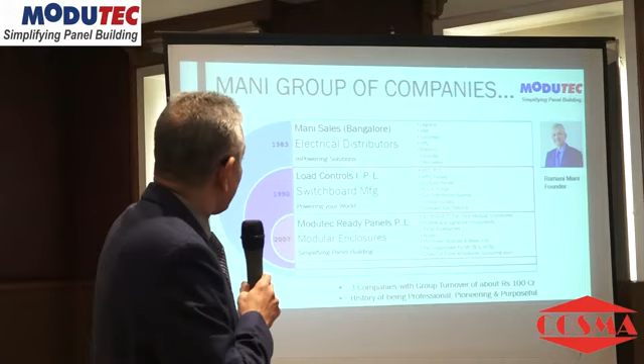Load Controls is a switchboard manufacturing company which started in the year 1990, and the entire range of products is there, what we manufacture. When I started in 1990, thoughts kept going in my mind. I also had a lot of problems in business. Sometimes you're flooded with orders, you have to refuse orders. Sometimes there's practically no orders.

You have to sit down with your, in those days we only had a telephone index, and then calling up each one saying that, yaar main hoon aapke liye, kya halchal? And this was the kind of situation. So the thought process was, what is it that I need to be doing differently in order to have a more steady growth? So in '96, I went to Singapore. In a week's time, I visited about 18 panel building units.

And that's when I came to know that even in Singapore, they have the conventional welded panels, but they also have a very beautiful semi-modular, semi-bolted design of panels. And what really took my breath away was a completely modular, world-class enclosure system. This was manufactured by a company called L Steel, who are also there in Goa. I pursued, went over, had a look at their factory. A lot of efforts were put into understanding how we can bring this modular technology to India.

So I got onto the drawing board because importing and selling in those days were very difficult because of the import duties which were there. And in the year 2000, I introduced the modular technology in a very simple fashion. But the moment I introduced the modular technology, I dropped the welded technology like a hot brick. Now, what happened was the ease of manufacturing enclosures was so very inviting. Customers were very happy with the look and feel of the panel.

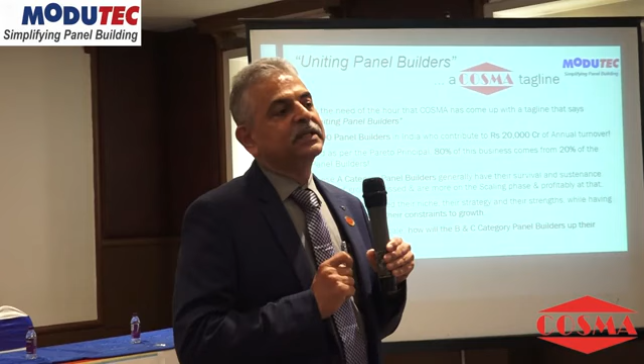So all the 3 companies together do a turnover of around 100 crores, and we have a history of being professional, pioneering, and purposeful in whatever we do. I must thank COSMA not only for this opportunity of presenting Modutec to each and every one of you, but also for this beautiful tagline called Uniting Panel Builders. And in one sense, I would say that this is a kind of a mission for Modutec as well. And we need to be seeing how we can do this.

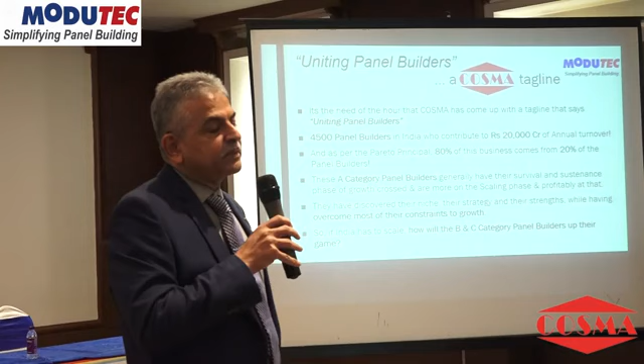In India, there are approximately 4,500 panel builders across the country. And about 20,000 crores of annual turnover gets added by the control panel industry. But then if you look at the Pareto principle, it applies beautifully here also. 80% of the business comes from just 20% of the panel builders. And this is something for us to really think about.

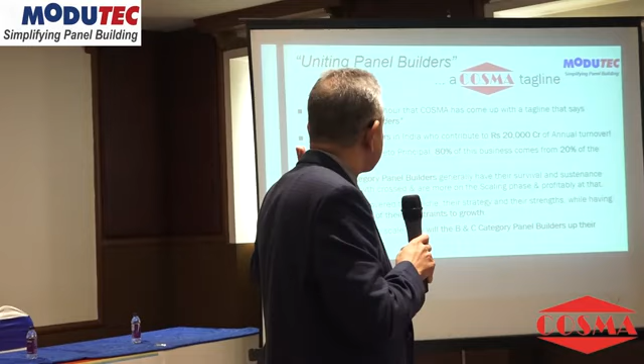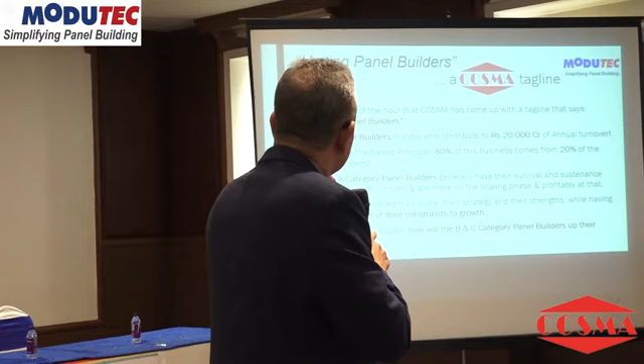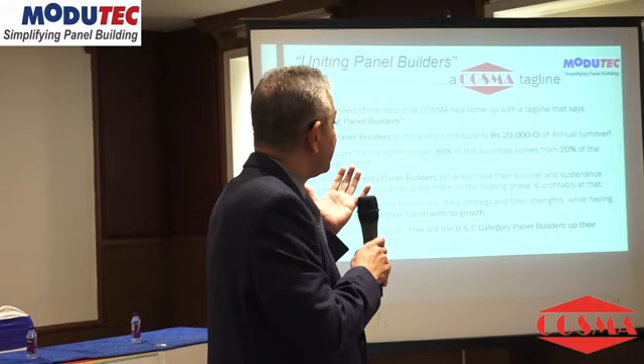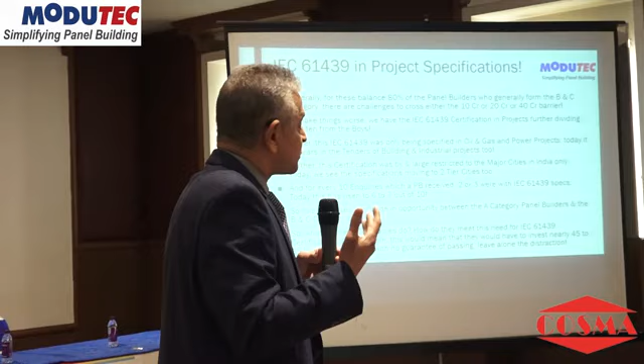Why is it so? The A category panel builders generally have their survival and sustenance phase crossed, and they are more on the scaling phase, and profitability also automatically happens with that. And how? Because they've discovered their niche, their strategy, and their strengths, while they've overcome most of their constraints to growth. So if India has to scale, how will this happen without the B and C category panel builders moving up in their game? This is an important question which each one of us should be asking ourselves. IEC 61439 in project specifications has become something for us to reckon with.

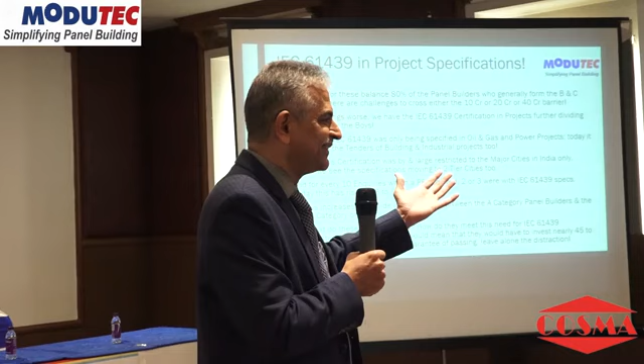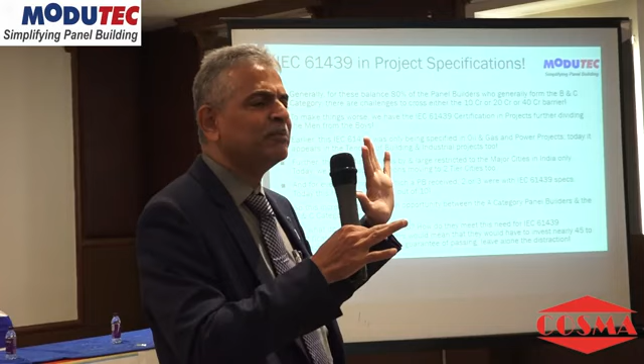Generally, for the 80% of panel builders who come under the B and C category, I've been talking to a lot of panel builders recently, and over my 38 years in business, I find that there are panel builders who get stuck at 10 crores and year on year stay in that range. There are panel builders who reach 20, but that becomes a kind of barrier for them to cross. And then you have 40 crores, and those who cross 40 crores are very few, you can count them on one hand, sometimes maximum two. Why is this kind of situation there?

To make things worse, we have IEC 61439 certification in projects, further dividing the men from the boys. It's not something which is within reach. It's a very expensive affair to get certified for IEC 61439.

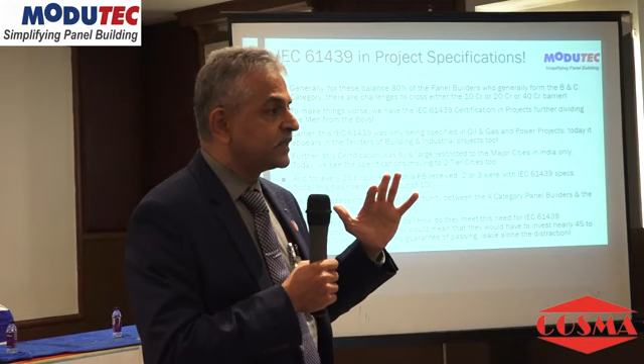So what happens in India? Earlier, IEC 61439 was only specified for oil, gas, and power segments. Today, even in building segments and industry segments, they are asking for this certification. Further, the certification was largely restricted to major cities; today it's coming into two-tier cities also. People want this specification. For every 10 inquiries a panel builder used to receive in the past, hardly 2 or 3 were asking for IEC 61439. Today, this trend has become almost 6 to 7.

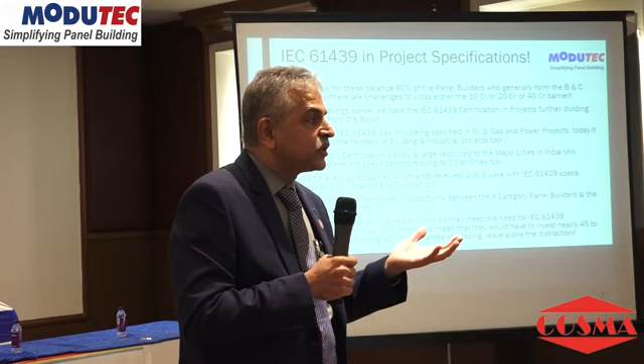In fact, for those who may not know this, from May of this year, Australia has made it mandatory for panel builders to be IEC 61439 certified. Without that, you don't sell panels there. So it's a question of time before India also comes into this phase of making it mandatory. In India it might take a decade, it may take two decades also, but the trend is there, and that's something for us to recognize.

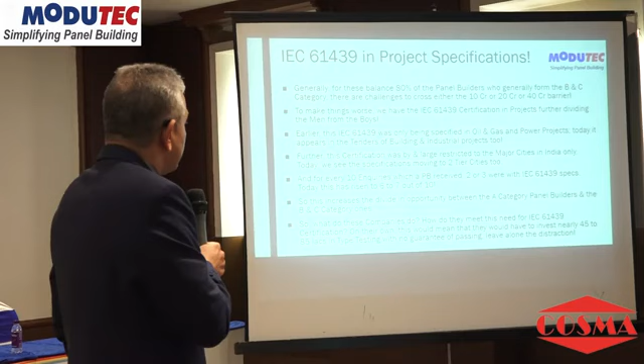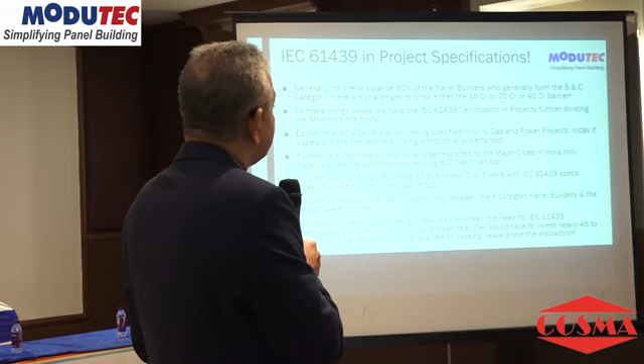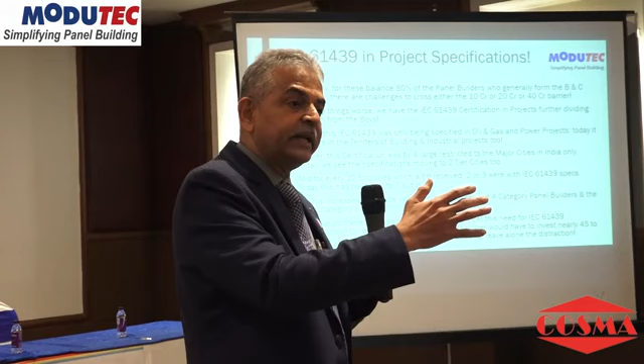This increases the divide between the A category and the B and C category panel builders. The A category panel builders are becoming bigger and bigger, while B and C are finding it difficult to survive and sustain their growth. So what do these companies do? How do they meet this need of IEC 61439? On their own, this would mean they need to invest 45 lakhs to 85 lakhs for type testing. Unless you put that kind of money aside, apart from money, it's also about your time, your energy, your resources which you'll have to dedicate. And there is no guarantee of passing the test in the first shot.

Modutec is here to support you, and this is how we can do it. We are on a mission to simplify panel building for the panel builder. We have learned from our experience that panel building need not be complicated, and this is the message we want to take to the world and share our experiences. We are here to empower the panel builder to not just get compliant with the new IEC 61439, but also introduce them to the possibilities of standardization, systematization, and scaling.

If you look at the trend from about 10, 15 years ago, every engineer wanted to get into software. Why? Because for every panel we make, it becomes a customized panel. Suppose we supply panels to a club like this - whatever engineering goes into the manufacturing of that panel, it is dead after that particular engineering is done. But consider a software like Tally - you write out the software, and then look at the number of people who have the benefit of that software.

This is the advantage of standardization, and this is something each of us must recognize, and we must also probably educate our customers, because the more we get into non-standard and customized solutions, our engineering cost is going to go through the roof. This also has to do with inventory turns - it will enhance your on-time delivery, your lead time will come down, and the quality in how your panels are built will improve. So you'll see all these doors start opening up for you.

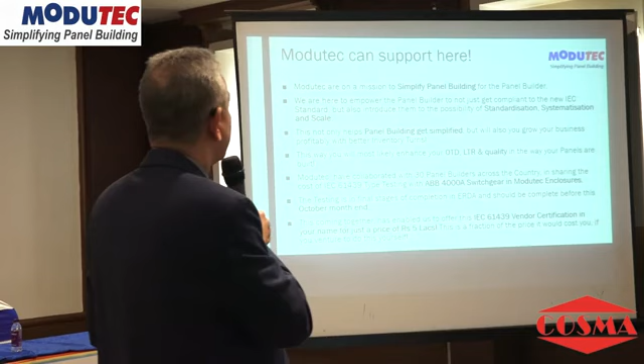Modutec has collaborated with 30 panel builders across the country. We asked, okay, if we have to bring down the cost of IEC 61439, what do we do? How do we do it? So I said, come along panel builders, let's get together and share the cost, because in Intertek ASTA, there is a provision for what is called a vendor certificate. So we use this provision to ensure that one time we do the type testing, and then we are able to give the certificate to many panel builders.

Within a very short period of time, 10 panel builders came over. I went on digital media and said, can we make this 20? And to my surprise, 30 panel builders came. And that is how we were able to reduce the cost.

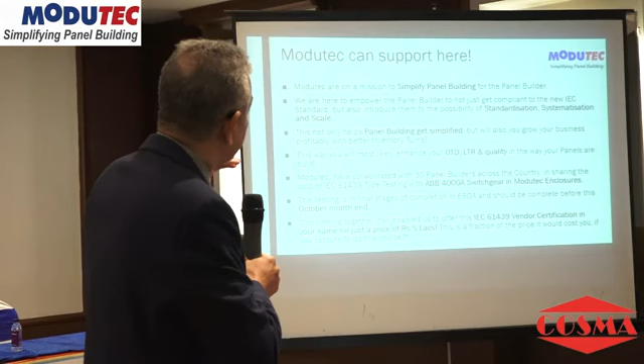Now what happens when we do this is that the certification of, in this case, ABB with 4000 amps, 65K for 1 second, IP43, and all these specifications, we are getting it type tested under the aegis of ASTA. There's been some hiccups, so it's taking a little longer time. COVID also had its impact on this, but 9.9 out of 10, within the next 2 to 3 weeks, we will be able to complete this test.

Now, when this test is completed, we will be giving this certificate to each and every one of those of you who have participated in this.

Now you all have seen the CPRI certificates, you all have seen the ERDA certificate. Now have a look at the ASTA certificate. For those of you who haven't seen it, this is the kind of professionalism with which the certificate comes. Dilip, just open and show. This is about a 200-page book.

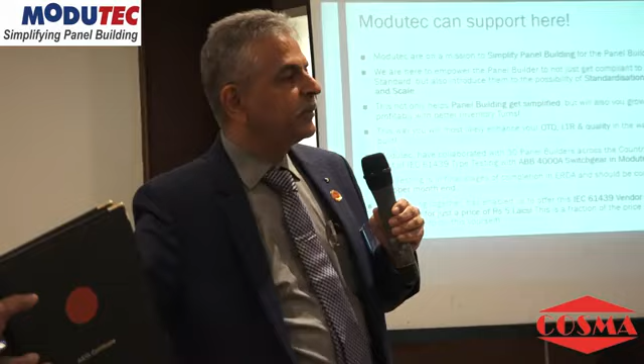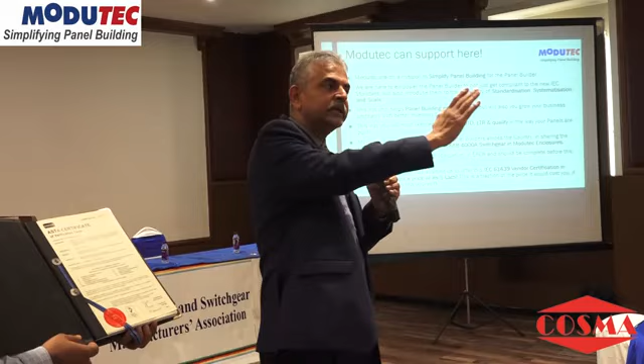The first page is where your name and address will come. Now the point is that this first page has all the tests which are conducted for this IEC, and once you take a photograph of this and put it up on your website, in your brochure, make a poster of it and put it up in your cabin, it's a matter of pride about how you are no longer a panel builder who is not certified, but you are a panel builder who has the certification of ASTA. And this takes you to a different league of being in the service of customers for panel building.

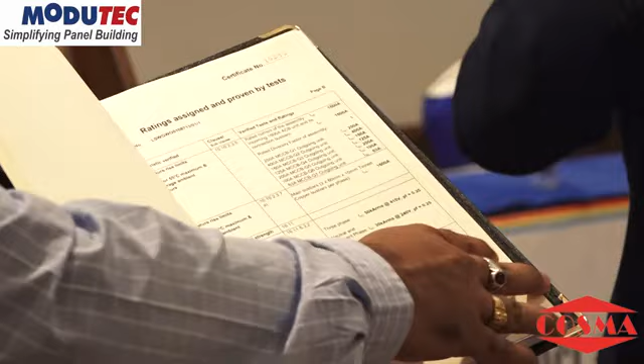And then if you see, you'll find that all the remaining pages will explain each and every test which has been done, what are the results of this test, including the photographs and the engineering drawings, etc., with all the bill of material of, in this case, the ABB switchgear. So I'll come to it more.

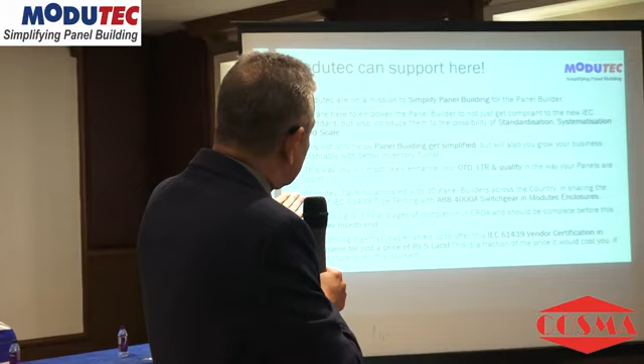So now the point I'd like to stress is that this certificate, because of the fact that we have been able to come together, we were able to offer it at 3.5 lakhs to all the panel builders. But we put an end to that and said that from 28th of September onwards, it is going to be 5 lakhs. Now why did we increase the price?

We increased the price because we realized that my job doesn't end with just giving you the certificate. My job, in fact, starts when I give you the certificate. After that, there's a lot of hand-holding which will have to be done. I'll have to increase my number of staff to visit each one of you personally, to hand-hold you in the running of upgrading from a welded technology to a modular technology. So there is a lot of expenditure also which will go along with that, right? So that is the reason why we upped the price to 5 lakhs.

Now, whenever we have a Cosma get together, it's always a time to give. And I'm sure Satish Bhai, who is listening to this program now, will also appreciate this fact that Cosma has been an inspiration for me. It will soon be an inspiration for each and every one of you who start involving yourself more in the activities of Cosma. There is a lot which I have personally gained as a panel builder from Cosma, and therefore it is giving back time.

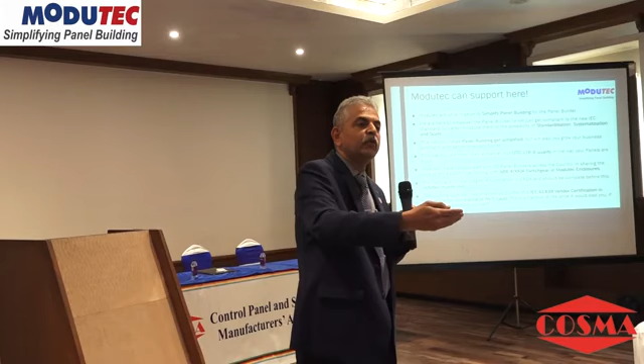So what I'm going to request him to do is, for those of you who will be interested, just take your visiting card, sign on that and hand it over to him. And we will ensure that this price is held for you. Okay, so we'll have to closely follow up with you, and within the next Monday, Tuesday, or Wednesday, we could take your advance, and then we can take it forward.

And once you sign and give it, we will also send you all the details of this. Most of you would have already received it, but for those of you who have not received it, we will send you the PowerPoint presentation, which has all the information, and then you can take a call.

Now why I appeal to you to join us in this is that, number one, it'll take you to another league of operating from, and it'll be in your name. So this is very, very important. And once you do this, then you're automatically telling the world that your IEC 61439 specified, number one. And number two is that there are other advantages which I will come to.

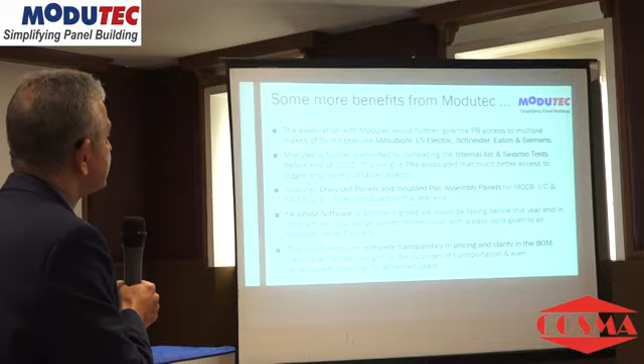Some more benefits from Modutec is that the association with Modutec would give the panel builder access to multiple makes of switchgear. We have type tested with Mitsubishi, LS Electric, Schneider, Eaton, and Siemens as well. We have certifications for all these breakers, and that certification will be made available to you. We are committed to doing the internal arc and seismic tests also before 2022, so that will also be available for you.

We are also getting into draw-out panels, as well as molded pan assemblies for MCCB incoming and MCCB outgoing. What we've displayed here is a molded one for MCB outgoing. We are going to be making this in MCCB outgoing also, which will compact the entire panel.

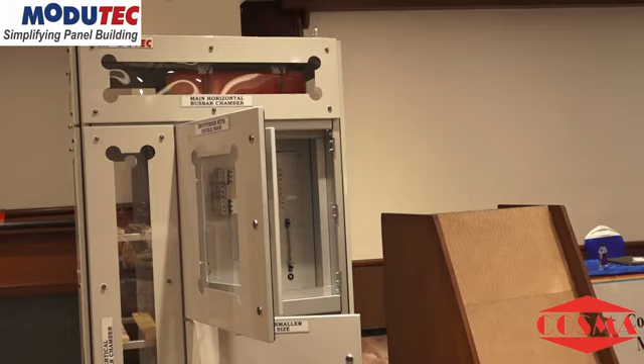We did a project called Kia Motors where we supplied around 600 such MCCB incoming, MCCB outgoing, but we did it in the open copper busbar arrangement. What the world prefers is to have a molded one, so we are working on that as well.

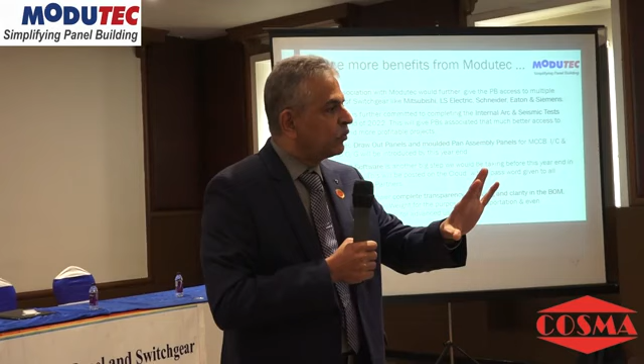ModSim software is another big step which we would be taking. We have got a 2D version, but we find that it has got a lot of limitation, so we are now working on a 3D version of the ModSim software. What this will do for you is ask you a few questions, and as you answer them, the GA drawing will automatically come out on the screen. You adjust it however you want, and then on the press of a button, you will get the entire bill of material with its catalog number.

Every mechanical part which goes into Modutec has got a catalog number, and it will have its price, and the weight also will be there. Weight is more for your freight expenses and other calculations. And for those of you who would be advanced users of Modutec, we will also give you the development drawing through the software. I'll come to that as well.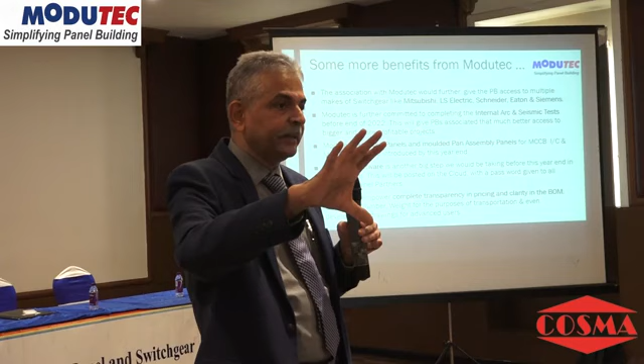So this would empower complete transparency in pricing and clarity in the bill of materials along with the catalog number. There's nothing left to ambiguity. It's very crystal clear what you're getting, what you've placed your order for. And this is something which will ensure that...

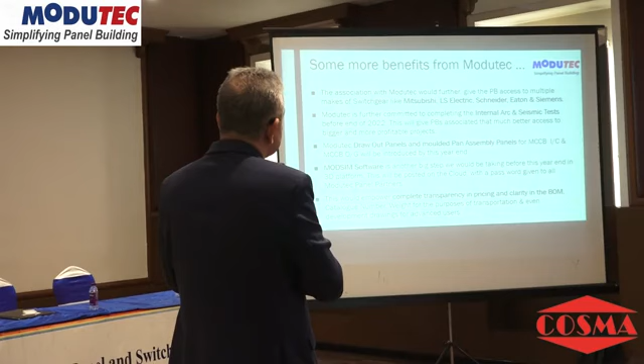One of the biggest constraints which I believe a panel builder has is the enclosure. And when you eliminate that in terms of on-time delivery, it would mean that you will be able to give your customers that much faster service. So some more benefits from Modutec.

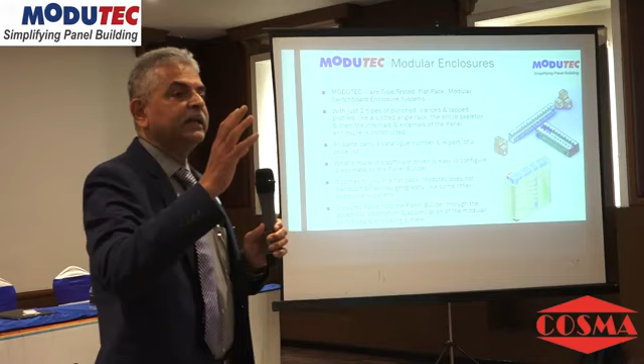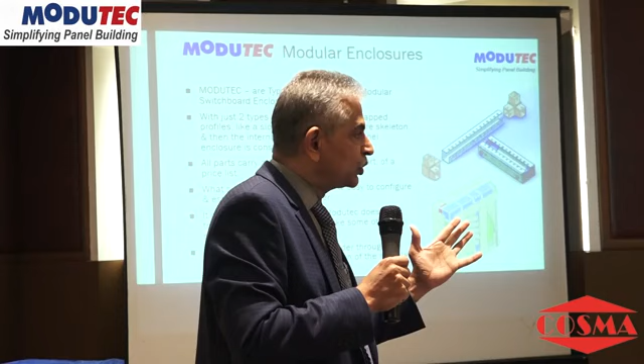Modutec is basically, if you see the structure of Modutec, it has just got two profiles, the frame bar and the crossbar. There are no other profiles which we use. I don't know how many of you have been exposed to other IEC 61439 modular enclosures available in the market. If you are, you'll realize that quite a number of them have got multiple types of profiles. We simplify the whole thing by just making it two, with tripods which go into the 8 corners.

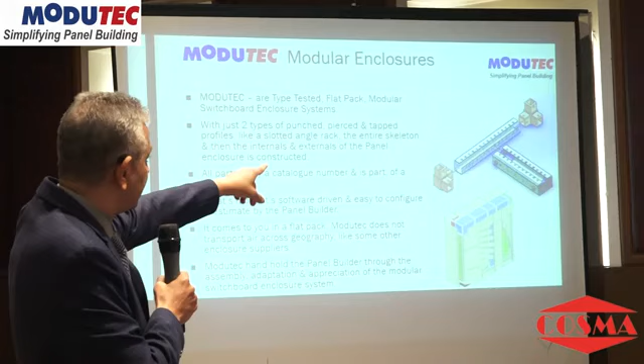It's all available here for you to have a look at it. Please have a closer look.

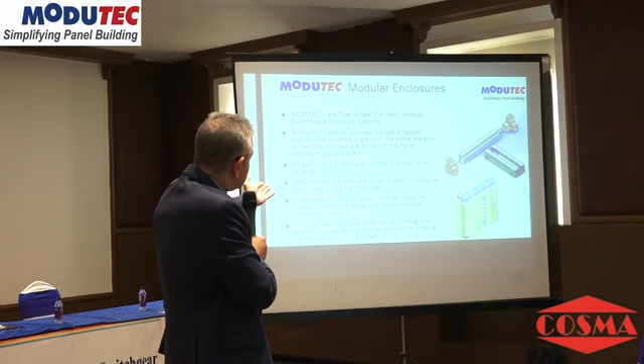Just to summarize the product range, what Modutec has - our prime product is the Modutec, which is your Form 3 and Form 4 enclosures, which comes in flat pack and has this type testing. Then we have the ModSim, as I've told you about the software. The ModDraw, we are going to be releasing it hopefully by the end of this year.

ModPan, we are working on. Open design is already available. The molded design is what will be released shortly.

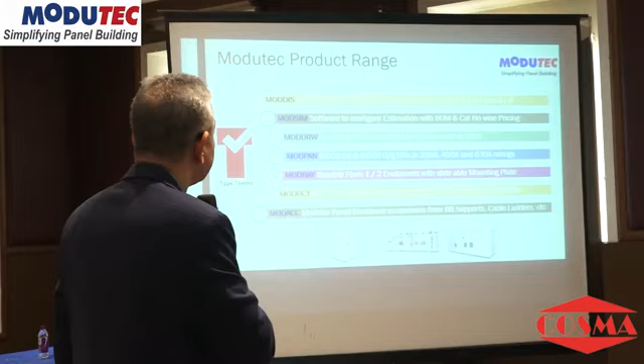Mod Bay is your Form 1, Form 2 enclosures, so we couldn't bring too many panels. So what we did was, behind this panel, we made a kind of a sample of a Mod Bay, how it looks. So a Mod Bay design is also up there for you to have a look at.

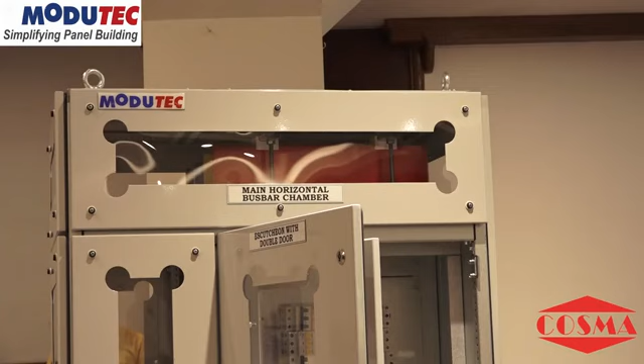The mounting plate has got a sliding plastic piece at the bottom. So it's very easy, even with heavy components mounted on it, you can easily slide it in, and it's depth adjustable with a 3-point locking system for the door, etc.

Mod Duct is a beautiful product for those of you who'd like to try this out.

It's a modular air insulated bus duct, which can even be assembled at site. Particularly when you have a large volume of bus ducts to be done, it is very easy to do it with our profiles. Modac is a whole range of panel accessories which also comes along with whatever we are offering you here.

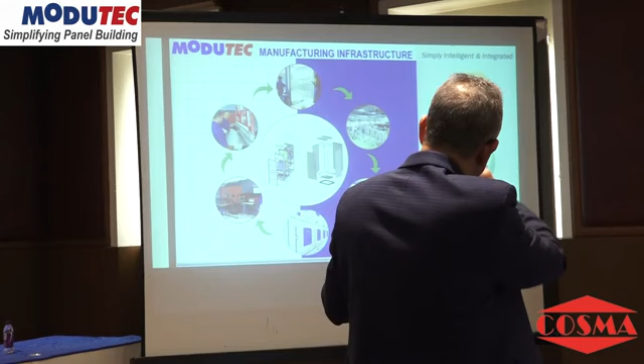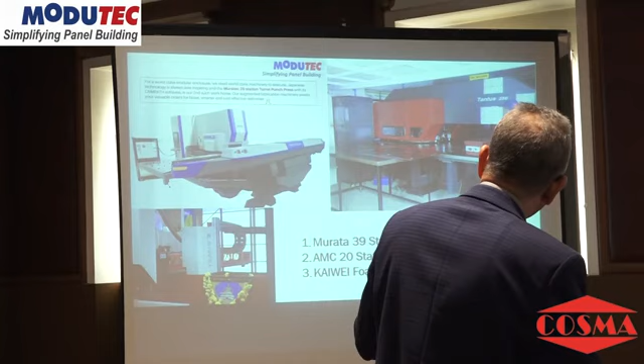This is our infrastructure. You're most welcome to our factory in Bangalore. We'd love to show you around, and right from design to the entire assembly, we have the entire infrastructure of CNC turret punch press. We have 2 of them, and we have a foam gasketing machine also. All the gaskets in the doors here are foam gaskets, so it's seamless. There's no opening in the gasket. So our panels have been type tested for IP54.

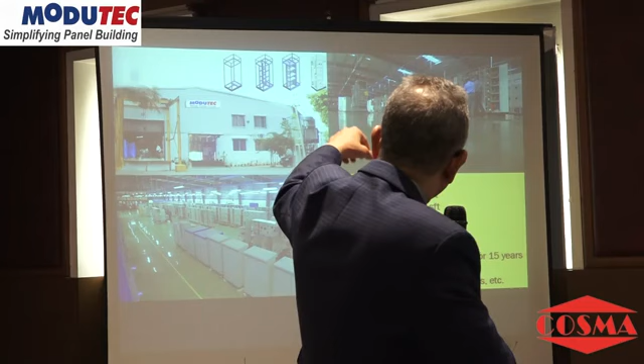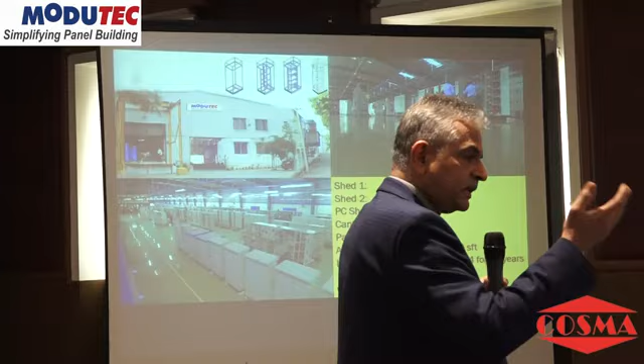So this is the factory, where we have 100 feet in width and about 450 feet in depth, so it's about 45,000 square feet. The central height is around 27 feet. There are no pillars in the middle of the factory. We've got epoxy flooring. We've now taken another shed, which is another 11,000 square feet adjacent. Powder coating is 5,000 square feet, your canteen and parking and all of that. And there is space for future expansion also available.

Now, from Modutec, I was telling Mr. Prashant Deshpande, he's been one of our very loyal customers for a pretty long time. I was having this conversation with him. Prashantji, you've been buying Modutec enclosures from me. What exactly is the reason you're buying it from me? Is it because our technology is modular and you're able to tell your customer that we are different from the rest of the panel builders? Is that what inspires you to buy Modutec?

So he says, no. My customers, they don't look at all that. For my customer, whether it's modular or welded, it just doesn't make a difference. Then I said, why are you buying Modutec enclosures from me? He was saying that when he has to place the order for the enclosures to the local manufacturer, he takes anywhere between 2 to 4 weeks to give the enclosure to him. And then there is this running around in terms of precision, in terms of clarity in communication, and so forth. Whereas when he places an order on Modutec, the second or third day, we dispatch the entire profiles with the joiner pieces to his factory.

So within the 4th or 5th day, the entire skeleton of the panel is ready. In his case, he does the partitions himself. So he puts the partitions, and the 6th or 7th day, he is able to fit the switchgear inside, put the bus bars, everything is a parallel activity. And from the date of the purchase order, within 7 to 10 days, I send him the doors, and practically within 3 weeks, he is able to send the panel itself out. And he says, this I'm not able to do with the local fabrication. I'm not able to get the speed.

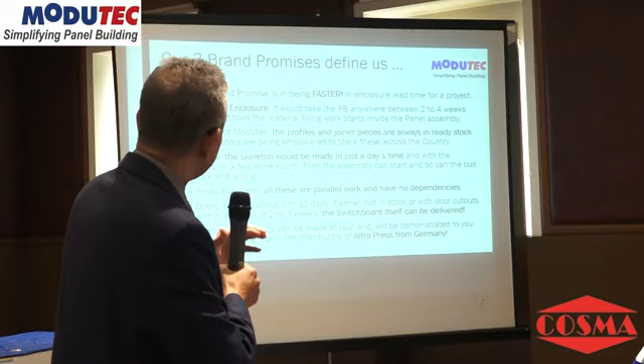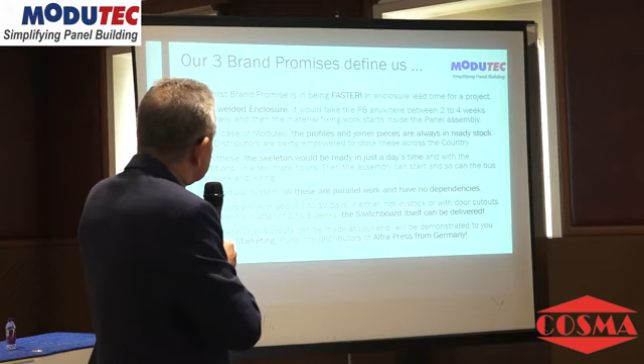And I would imagine that even if you try and do it in-house, you will face the same kind of problem. So the first brand value we offer you is that we help you be faster. And this is very, very important in terms of project completion in time. So I think I've explained most of it, so I'll go forward.

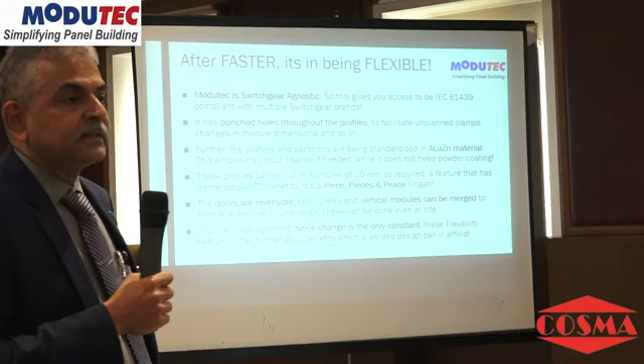Next to being faster, Prashantji said that change is the only constant in our industry. From the inquiry to the order, you'll find that there are some changes. And then after the drawing is approved and you are in the midst of your manufacturing, there will be some changes. And it's not uncommon that when the panels go to the site, they would want some changes in the panel, right? And this is very difficult to accommodate in a welded panel.

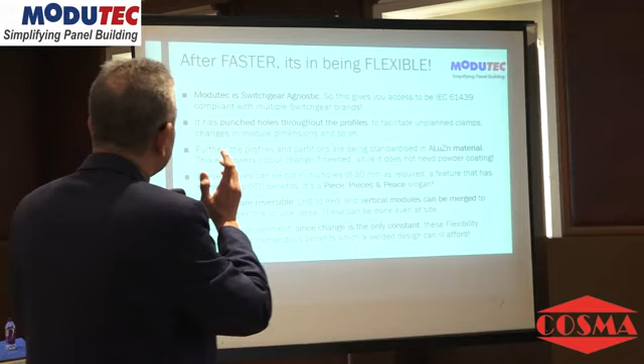Whereas in the modular panel, we have all these holes punched. Last minute, you want to insert a temperature monitoring device. You want to insert another clamping arrangement with some other item which is important for the customer. You can easily do it without much ado. Whereas in a welded panel, how difficult it would be, right?

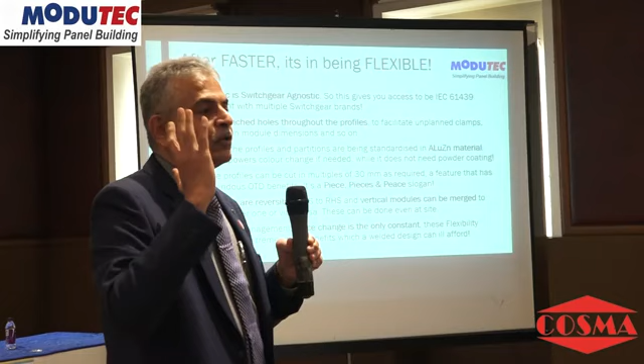Another big advantage is that when you start using and stocking our profiles, the beauty of our profiles is that every 30 mm interval we have holes punched and pierced. Therefore, literally in x-axis, y-axis, z-axis, we can give you any panel of any dimension in multiples of 30 mm. Now, suppose you have an 1800 mm length frame bar, and you want a 900 mm length frame bar without which your panel is not going to get complete for some reason, right?

There are other modular designs which are available. You'll have to wait till that frame bar or crossbar comes to you. Whereas in our case, you can actually cut it and use it, and you can use the rest of the piece wherever else you want. So this is what we call pieces, and it gives you peace of mind, right?

All our doors are reversible, right to left, left to right. These two modules which I've shown here, if for some reason you want to make a big module, you can just remove this piece and change the door. At site, you can make this change.

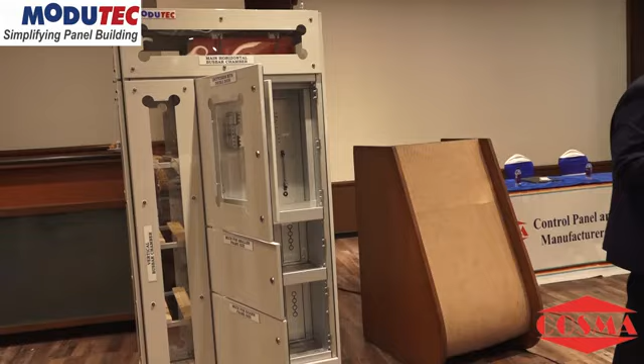You have a big module here, and for some reason you want to make that into two smaller modules. At site, you can make this change by introducing a crossbar and changing the doors. All this you can't dream of doing in a welded design panel. So these are important benefits for your consideration.

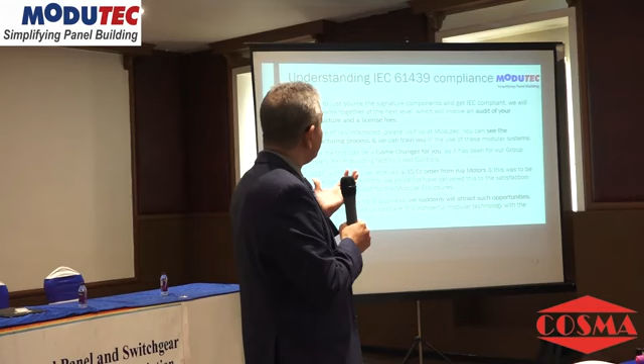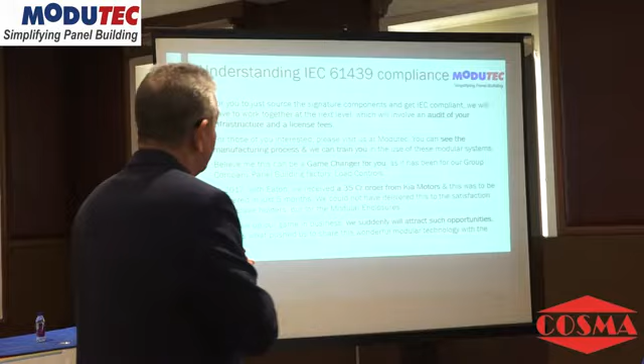Now, understanding IEC 61439 compliance is very important. This is another point which came out from my discussion with Prashantji. He was saying, look, I'm buying your enclosures and I'm doing the partitions myself. Why don't you just give me the profiles and I'll do the doors also myself. For me, the cost effectiveness is very important. So this is something which we have taken as a suggestion.

We have divided into Modutec, SNTech and PartTech. With Modutec, you get the entire enclosure, which is IEC 61439 compliant. With SNTech, you get the essential enclosure of the skeleton with the doors, and this is not IEC 61439 compliant. Then you can also take just the profiles from us with the joiner pieces, make everything else yourself, and that will also not be IEC 61439 compliant.

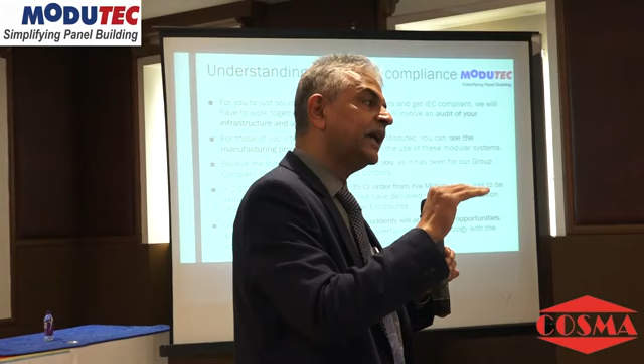Now, if you want to do that and still be IEC 61439 compliant, we have a solution for that also. For that, we will need to come to your place and inspect and validate your infrastructure, whether the Modutec brand will allow that, and whether you are capable of handling all the compliances we have gone through in terms of type testing. If we are satisfied, then we will sign an agreement with you on this license arrangement.

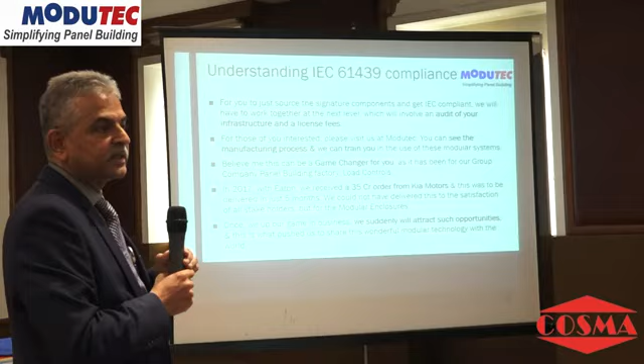Now, this modular system has been a game changer in load controls, and I'd like to share this experience with you. In 2017, Eaton came and literally gave us on a silver platter a 35 crore order. This was for Kia Motors. Now, what attracted them to come to us? Because we were the only modular enclosure manufacturers with the switchboard, and we were willing to work with them and get our enclosures certified in their name.

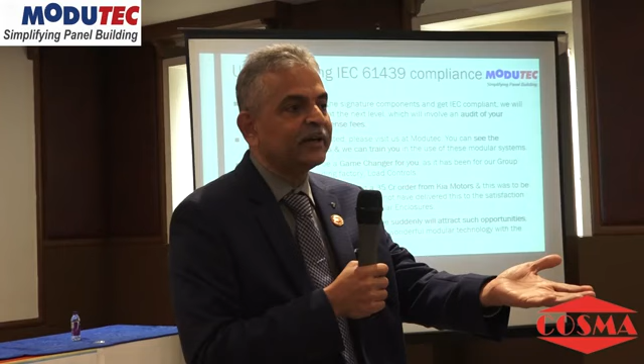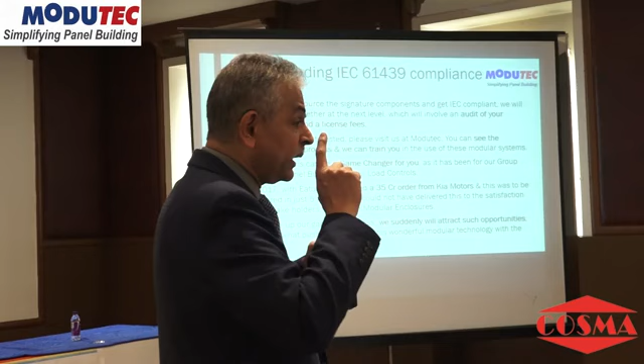So they chose us, we got the IEC 61439 type testing passed, not only for low voltage but for medium voltage also, considering the volume of the business. Now, this had to be executed in just 5 months. Believe me, it would never have been possible for our factory, which did 48 crores turnover the earlier year, to execute a 35 crore order the next year without the help of the modular enclosures.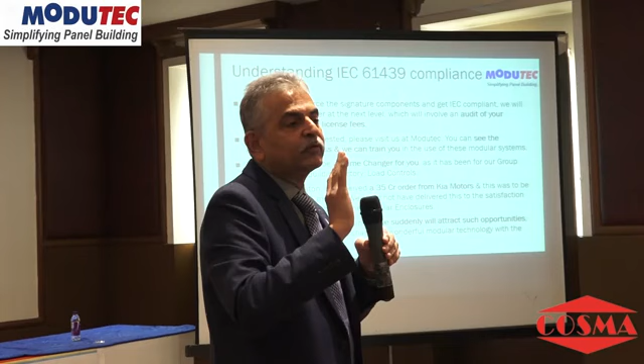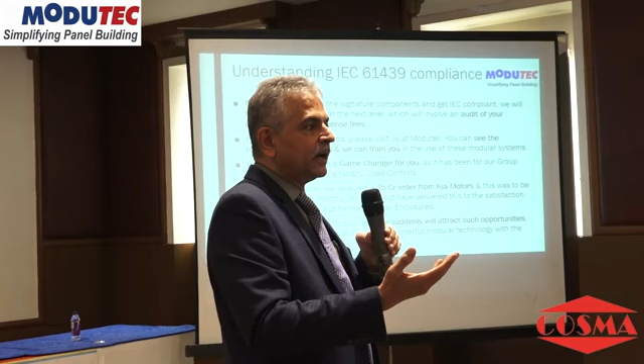And this is when I said that this is too good an idea for it to go to the grave with me. I must spread it with the world and benefit other panel builders. So this was the genesis, and it could be a game changer for your business as well.

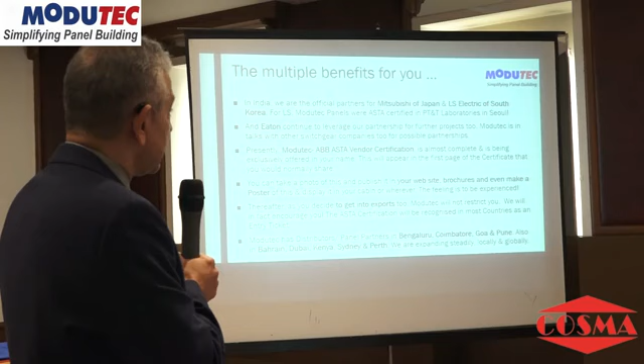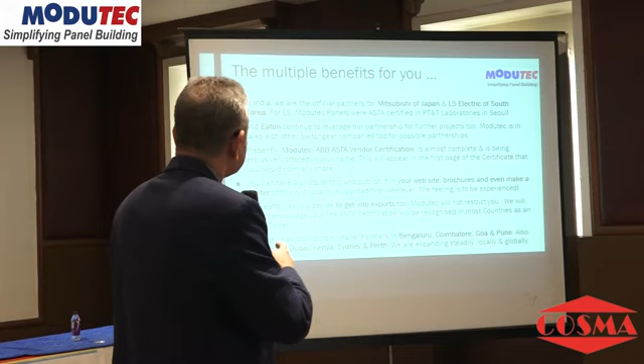There are other multiple benefits. As I said, we are the official partners for Mitsubishi and LS Electric in India. When we got into this Modutec business and participated in Elecrama, immediately these two multinational companies came to our doors and asked, can we work with you? The R&D teams of Japan and LS Electric came in and approved our facilities. LS wanted us to get the panels type tested in Seoul, which we got done. In fact, Dilip went to Seoul and got the type testing done. This is available for you to leverage.

For LS Electric, we did this with aluminum bus bars for the Indian market. The head of LS who looks after the Indian market sits in Dubai. When he came down and saw our infrastructure, he said, let me see if I can buy this for Dubai also. They've been one of the significant contributors to our sales.

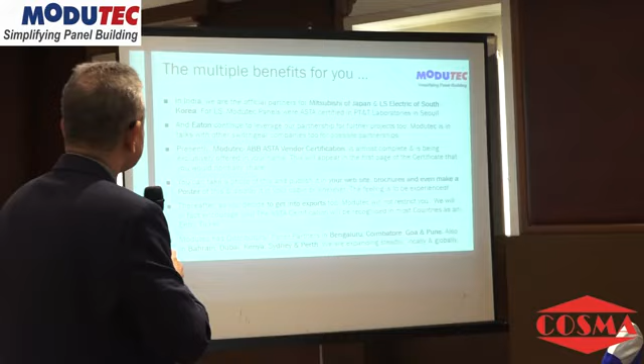They bought a lot of container loads of enclosures to Dubai. And 3 weeks back, they've given us a purchase order to repeat these 3 ratings tests with copper bus bars for the world markets. With Eaton also, we continue to work for projects, and the Modutec ABB certification, as I said, is almost complete.

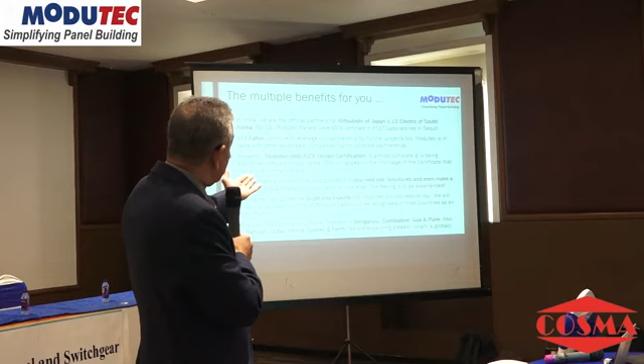You can put up these things, and then another beautiful thing is that, when we say that we want to scale our business, one market which we should not ignore, in my opinion, is the export market. Because that is where there is a huge potential. If you look at Ambit Switchgear, you go into his website, he's present in almost 20 countries. Now, when Anand Singhal can do it, then why can't you and me? And the kind of pricing you'll get when you go overseas is also fantastic in comparison with what you get here.

Asta Intertek certificate will help you get an entry ticket into the export markets. The moment you show them an Intertek Asta certificate and say that you're IEC 61439 qualified, the door opens for you. So this is also something for you to consider.

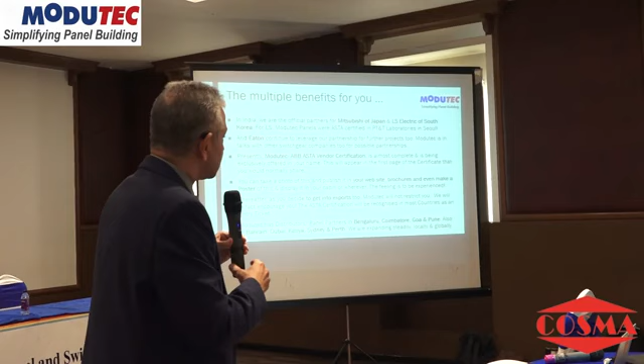Today we have distributors and panel partners in Bangalore, Coimbatore, Goa, Pune, and also in Bahrain, Dubai, Kenya, Sydney, and Perth. So we have expanded ourselves, and we are looking at Europe also, we're looking at Russia also, all in good time. And South Africa, we are almost closing the distributor agreement with one of the big players out there. So that is it from me.